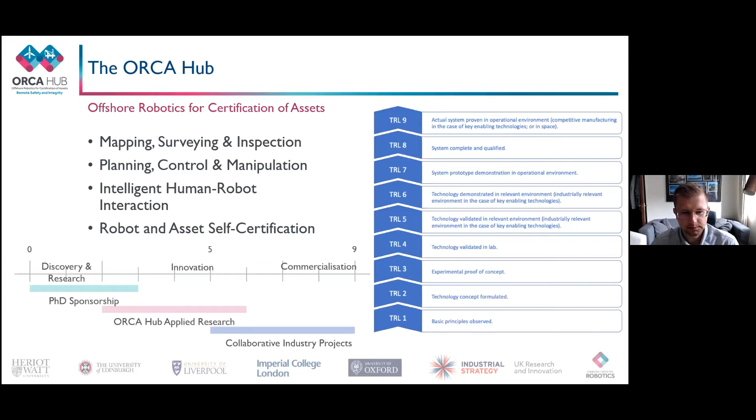ORCA Hub is quite unique in this regard that it tries to bridge the gap between early research and commercialization. On the TRL scale, we try to move between levels 3 and 6. Keeping this in mind, I will discuss solutions that we've developed following these TRL scales, starting from the bottom and ending with solutions which are ready for commercialization.

Again, if we want to have something applied and really used, we have to focus on some key problems. First one being robustness. Demonstrating something that works once is not good enough for us. We want something that works in a wide range of conditions, which is a tool that we can rely on. And we need it to work in real time because underwater vehicles often cannot be connected to the surface with bandwidth required for any kind of computation happening on the surface, or this connection is not reliable enough to run it this way. So preferably everything should run on the vehicle in real time. These two factors, robustness and real-time performance, are key enablers for autonomy, and this is our end goal. We want underwater vehicles to move autonomously, perform the most challenging tasks autonomously, and that's what we're working towards.

Within work package 1, we focus on solutions based on SLAM, simultaneous localization and mapping, based on supported vision. By supported vision, I mean the main source of information are cameras for moving around and localizing ourselves. But we also fuse this visual information with other sensors like IMU and DVL for best possible performance. Finally, we would not only want to have a 3D map at the end of the mission, but also have some understanding of what's in front of us and what it means for the objective of the mission. Hence, we also work on semantic mapping and scene understanding.

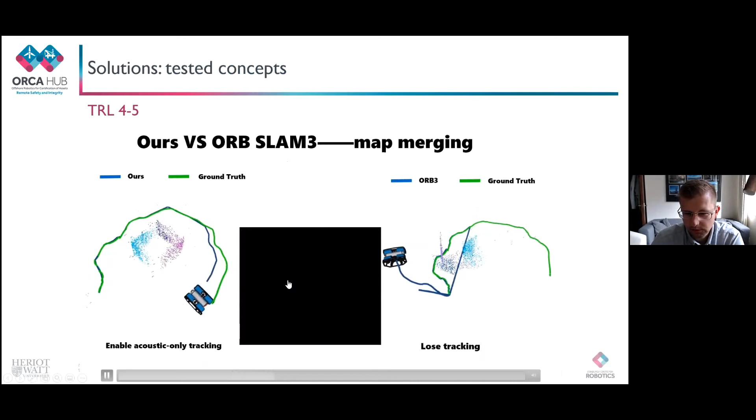That's why let's jump quickly to TRL 4 to 5, and these are very exciting results. This particular work is by one of our PhD students. Here we compare his SLAM approach to ORB SLAM 3, which is state of the art. Every now and then he introduced black frames, which corresponds to loss of visual features, either due to very bad visibility or something occluding the field of view.

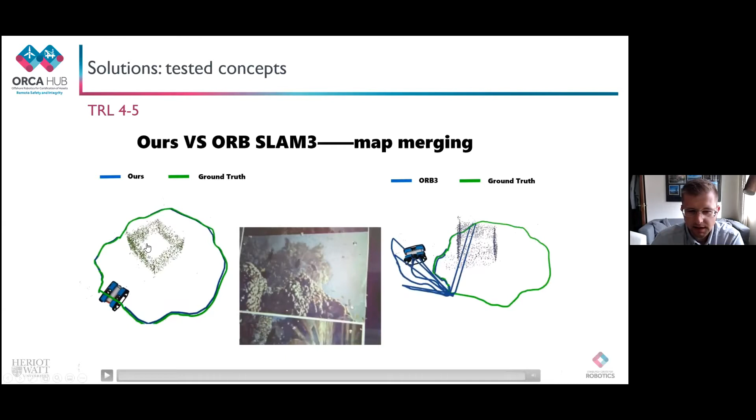You can see that ORB SLAM 3 creates submaps, but in between these maps, it's completely lost. It doesn't know how to join it. In our approach, these submaps are much better aligned to begin with, and after moving a while in the region, you can actually rejoin these maps together and get to a consistent single map.

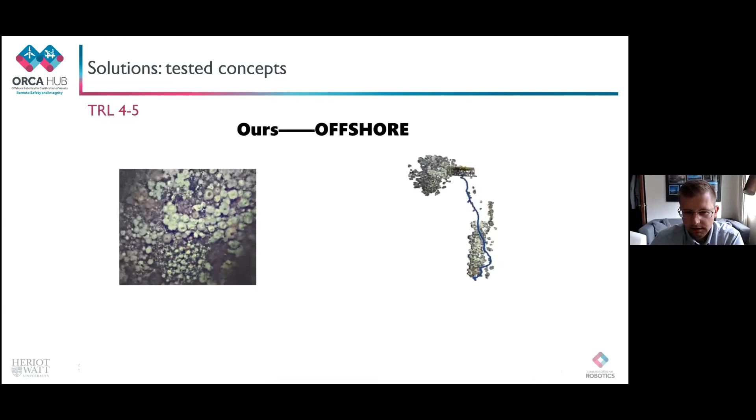And the calculated path taken by the vehicle agrees with the ground truth that we had for this experiment. So that's a great success, and this was also tested offshore. This is data recorded offshore. As you can see in the video, very challenging conditions. And even though we didn't have ground truth for this, just assessing the quality of the result, visually it looks like it's a correct solution.

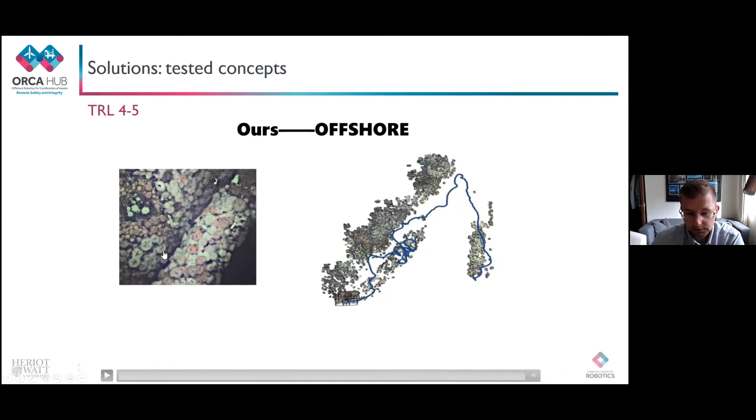So everything that should be straight pipes look like pipes. And again, this data set was very challenging, to the point that we didn't think it would be of any use at all. And yet it managed to, this algorithm manages to work in these conditions.

And thanks to that, we are able to develop a more holistic approach to autonomous inspection. I don't want to go into this bit of work because this will be discussed in detail in the next presentations, so just a hint that that's very much ongoing research. I put it on TRL 4 to 5. It's being developed very quickly, so possibly it's on the verge of 5 to 6 at the moment.

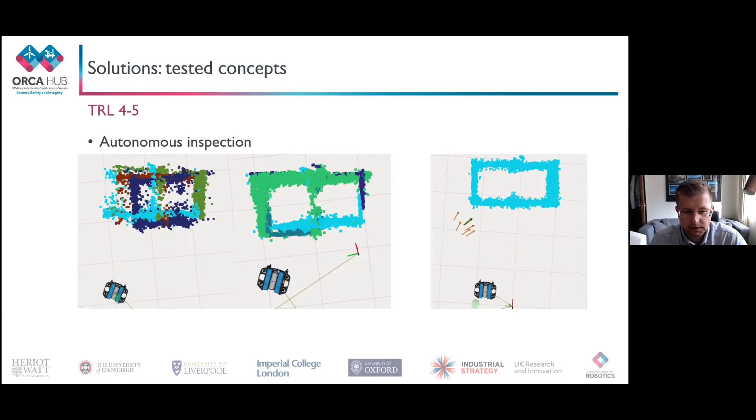Yeah, and this allows inspection to be executed fully autonomously without any intervention from the pilot side.

Okay, and TRL level 6 to 9. From our perspective, this means that these are solutions which are fully developed for our research. This is our toolbox of things that we use and things that we rely on.

So camera calibration and image rectification. The problem is that when you take your cameras underwater and you want to perform 3D reconstruction, all the images are distorted because of the refraction on the water-glass-air interface in the camera housing. And these distortions are very hard to rectify, to correct, because an image doesn't have a single viewpoint anymore. In a way, it's as if every pixel has slightly different focal length.

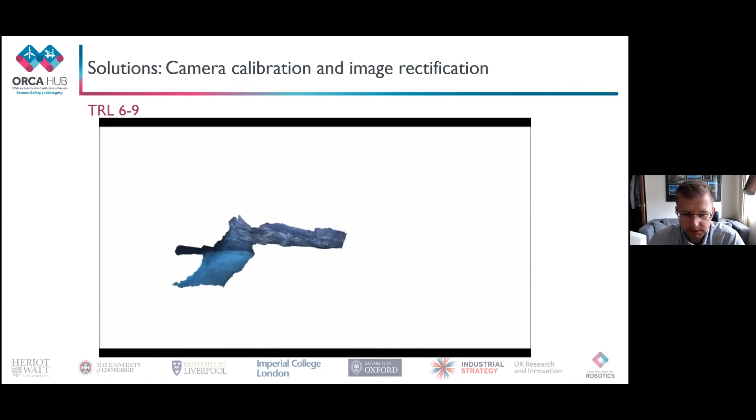And we have a method which allows not only to correct those, but you don't have to do any procedure on site. So you don't have to calibrate the camera in water, even though these distortions depend on water temperature, salinity, and pressure — conditions that can change from site to site. We just have to calibrate the cameras once in air and then know these parameters of water to predict the camera parameters.

In this experiment that you can see on the video, point clouds were just accumulated according to the vehicle odometry. So if there was any error in the image rectification, you would see each point cloud being slightly warped. And once they're overlaid, you will just see a lot of points flying in air.

And as you can see, we have a very smooth surface with no extra points in the wrong locations, which is a good indicator of very precise rectification, which is exactly what we want. So this allows us to get 3D reconstruction on exactly the same level as algorithms working in air, pretty much ignoring the fact that we are underwater.

Yeah, that's just a summary of the map from these experiments. Just a point cloud from that location.

And then second solution, which is also, I estimate, TRL 6 to 9, is image enhancement, where this algorithm merges multiple factors and multiple solutions into one very compact algorithm. So that's why I will show you a few experiments aiming at different things.

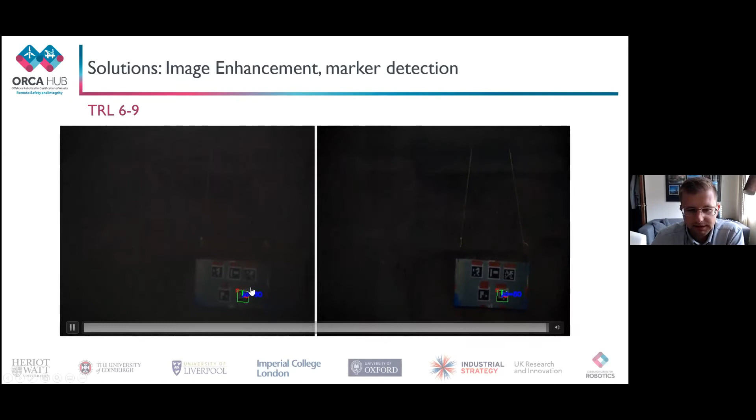This marker is just an easy way of simulating some kind of visual feature we can find in the environment. As you'll see later, this allows any vision-based image recognition, object recognition, and localization method to work more robustly. It extends the range in which we can successfully use whatever approach we decide to go with.

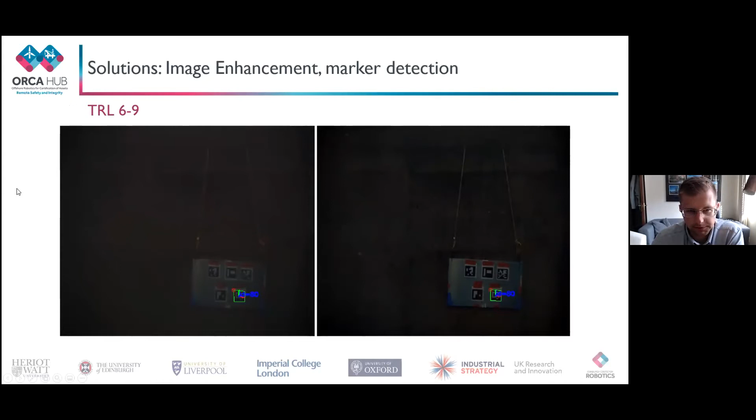Finally, exactly the same algorithm, this time working in open water. On the left is the raw frame recorded from the camera, and on the right it's being enhanced in real time. The slight lag in the video comes from the communication layer, not from the algorithm. The algorithm now works up to 40 Hertz on the stereo setup, so two streams of video.

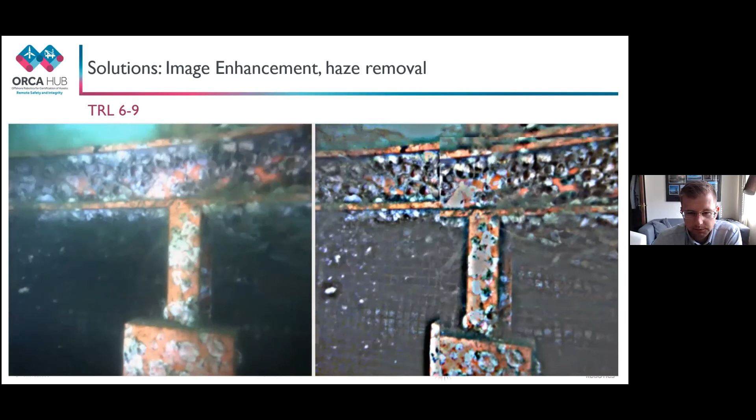And it's just this one image enhancement algorithm, so we could technically also improve colors or saturate it more. I didn't want to do that in this video, just to demonstrate this one algorithm rather than a combined approach.

I'll jump to an early stage here, on the side of the structure. The algorithm is in a way aware of the differences in enhancement it needs to make in different parts of the video. On the left of the image, where there's pretty much nothing there, it still attempts to pull all the information that might be there, which is why you effectively get this sensor noise.

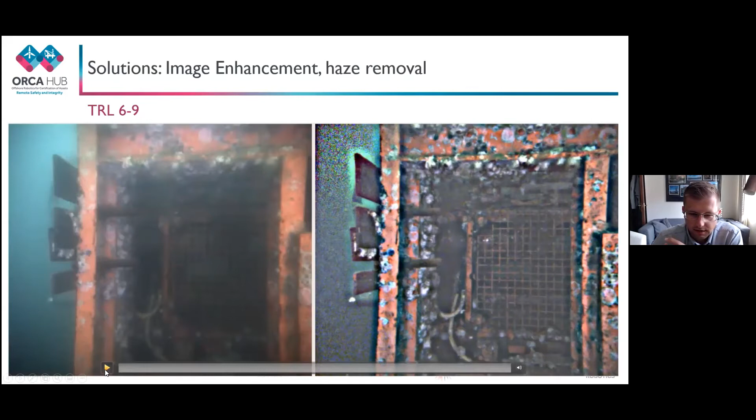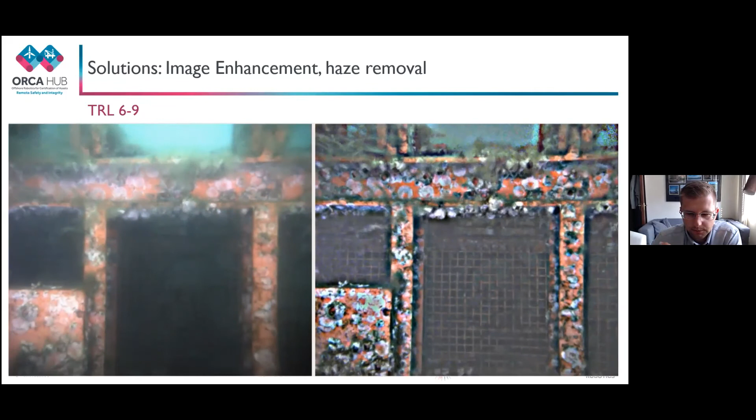In a place where there is structure close by, you don't get that, because if you tried to do the same level of enhancement, everything could be over-enhanced and destroyed. Here you don't have this effect - it's adaptively reacting to what's in the frame. If there's nothing or very little, it tries to be more aggressive; if there's already information in the image, it's a bit more conservative. So you get the most out of the data you recorded.

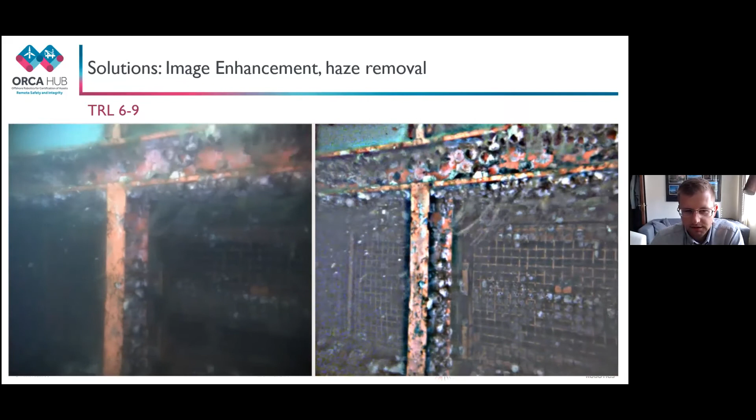That being said, it's a purely passive approach, so it has to have some residual information in the image in the first place. If the image is just broken, with nothing there, unfortunately we can't do anything about it. But that's very much the nature of what we wanted to achieve.

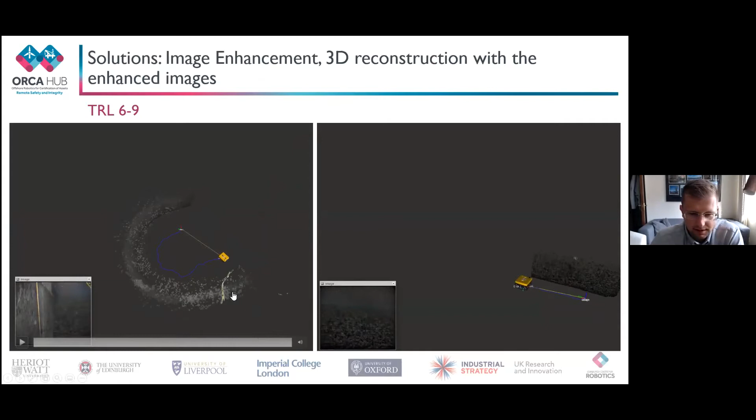That's because all the features it could match were very hazy. After enhancing the image, exactly the same algorithm with exactly the same parameters can reconstruct the structure and navigate on it without any problems, with much higher accuracy and no noise whatsoever - which is exactly what we wanted and what we observed. As long as we have any residual information, we can quite reliably operate around the structure.

That being said, sometimes we come to a location like a harbor after the rain, where visibility is 10 to 15 centimeters, and unfortunately we cannot do anything about it. But that's quite rare, and this was to be expected in the first place.

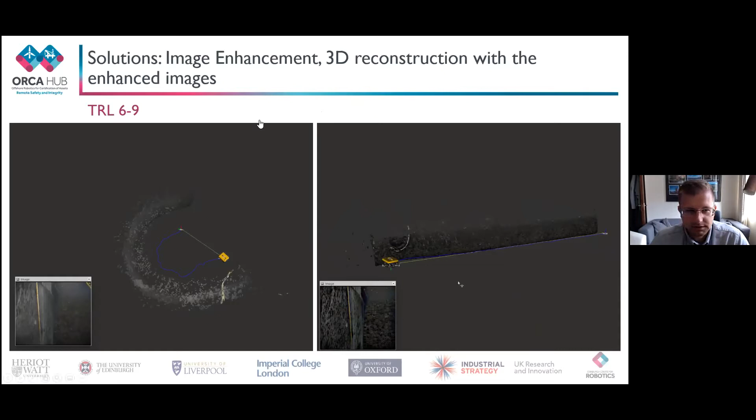Good morning, I'm Jonatan Scharff Willners, and I'm a research associate for ORCA Hub at Heriot-Watt University as well. I will continue this presentation by talking about how we use autonomy for underwater robotics and how we incorporate all the visual aspects that Tomasz has presented.

And to continue on the same motivation, I will instead focus on how we can use autonomy for robust online systems.

The motivation behind the work is that autonomous marine vehicles are seeing increased usage every year. Conventionally, these operations are performed from support ships, which requires a significant amount of humans, both as crew for the ship as well as for operating the ROVs. As the ocean is a harsh and unforgiving place, this is a dangerous task. By using autonomous underwater vehicles, we can remove humans from on-site operations, allowing them to be safe on shore instead. This also reduces the cost of operations as well as environmental impact, as we no longer need large support ships during operations.

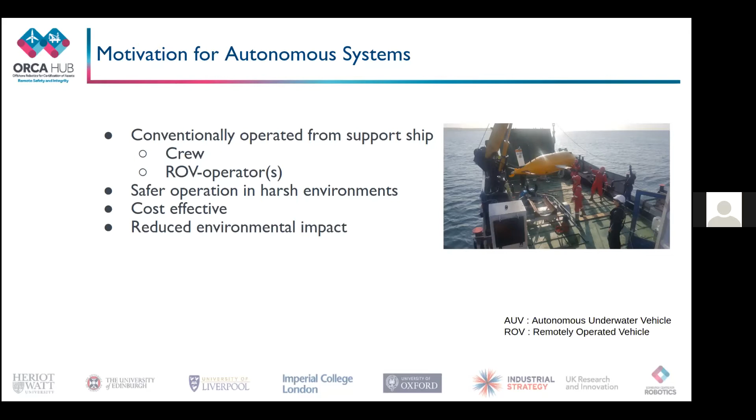AUVs have a wide field of usage. I will focus on two aspects for mapping, namely inspection and exploration, though they are also used for mapping for environmental observations and applications. In our group, we're also working on maintenance such as intervention, which can be seen in the picture where our AUV is equipped with a manipulator. What can be seen in the image is marine growth, which regularly should be cleaned to maintain the structure.

AUVs are also used to cover large areas for search and rescue missions, for example finding people or missing airplanes. They also see quite a lot of usage in deep sea operations, as well as in the defense sector, for example mine countermeasures.

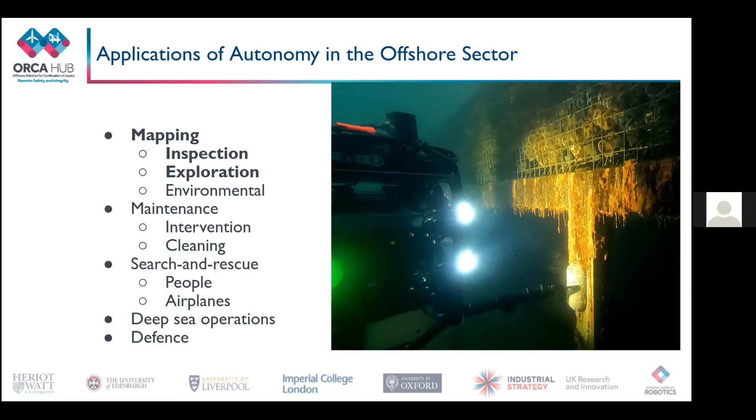During visual inspection of offshore assets, it is easy to lose tracking of the visual features used for simultaneous localization and mapping. There are multiple causes for this. As we've seen previously, it could be environmental, such as turbidity and inadequate water conditions, or internal, such as error and noise related to dead reckoning for pose estimation based on the navigational sensors.

At sea, we also have lots of external forces, such as waves and current, that can push the vehicle out of its desired position. And when visual tracking is lost, our SLAM system relies completely on dead reckoning and has no external features to update its position towards. Therefore, until our visual features are regained, the error and uncertainty can grow without bound.

To counter this, we have developed a framework for robust inspection based on autonomous relocalization. This work improves the success rate as well as the quality and the survivability of the system during its mission.

The framework for this we have called Situational Evaluation and Awareness, which combines knowledge of mission failure characteristics with planning for current states to provide system robustness over long time periods, while maintaining the quality of information gathering and goal execution. I will not go into much more detail on this, because Yaniel will discuss it further in his presentation after mine. The framework adapts to new information when a new error occurs during the mission.

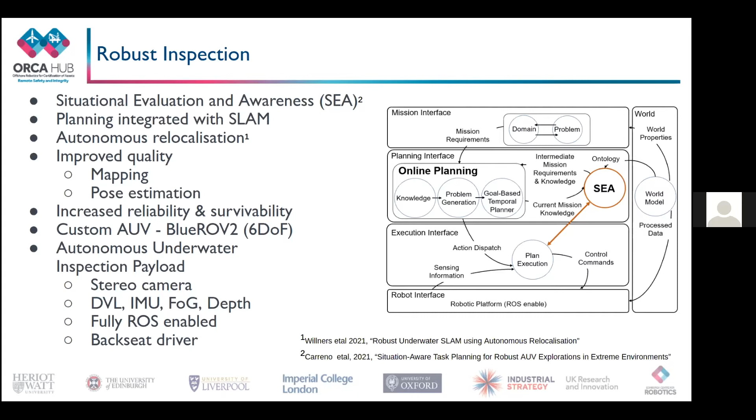We have integrated this with an ROV, which has been customized to be autonomous by adding what we call an autonomous underwater inspection payload. This acts as a backseat driver, and includes the stereo camera system seen in the previous presentation, as well as additional sensors such as DVL, IMU, fiber optic gyro, and depth sensor, so that we can have pose estimation at all times, even when we lose visual feature tracking.

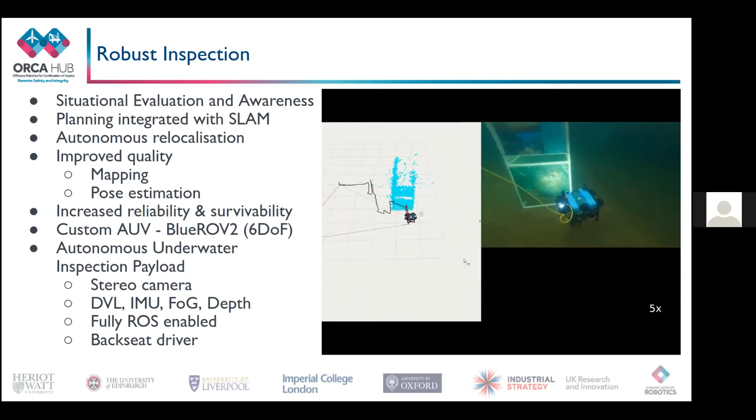In the video, you can see how an autonomous inspection of an artificial structure is performed while using the framework for autonomous relocalization. To show the efficiency of the approach, we force the vehicle to lose tracking by blacking out the cameras at set stages of the mission. By doing this in repeated inspections, we can compare how our approach has performed compared to not using active relocalization and just using a traditional waypoint following algorithm.

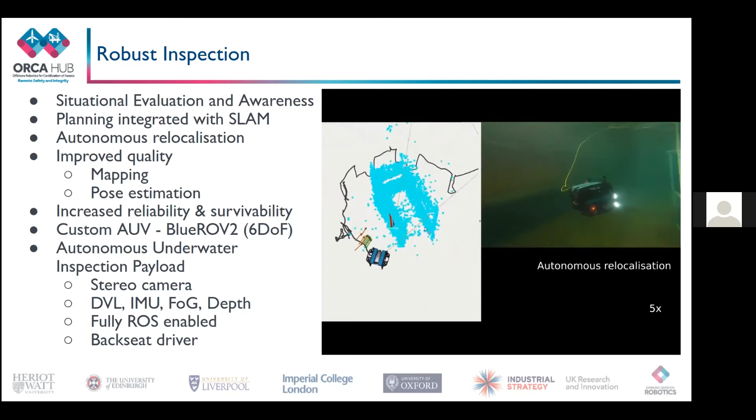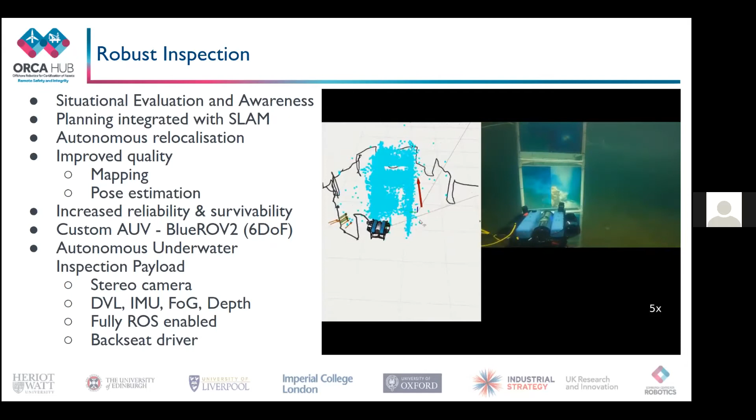As seen, the robot manages to relocalize when it's lost and is able to keep a single consistent map throughout the mission. In the video, when a map of a new color is presented, it has lost track and will try to find a temporal plan that merges the new map to the old map. The keyframes it's basing its new temporal plan on can be seen as the green arrows, and the orange ones are the ones it has found that it should visit to increase the probability of performing this map merge. It has now almost finished a complete lap around the structure, and after that it will return to a safe recovered position.

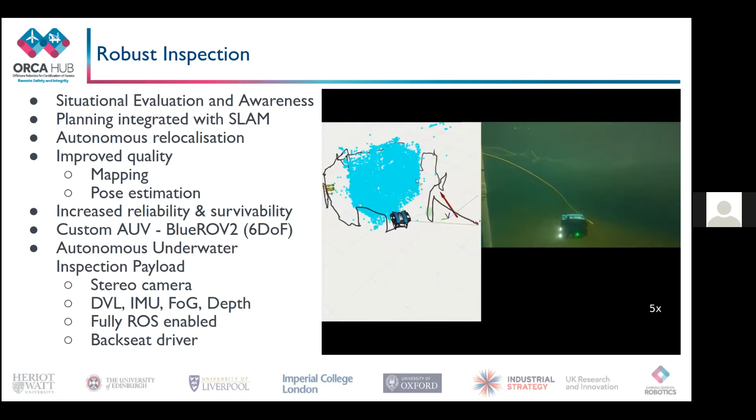Here it can be seen that using the presented framework, the robot managed to keep a single map at the end of a mission, while the compared approaches result in multiple submaps. The submaps are not properly aligned, which can cause error and lower quality reconstructions. Likewise, if it has multiple maps, it can result in a worse pose estimation, which can potentially grow with each submap until the robot cannot properly navigate in a global map anymore.

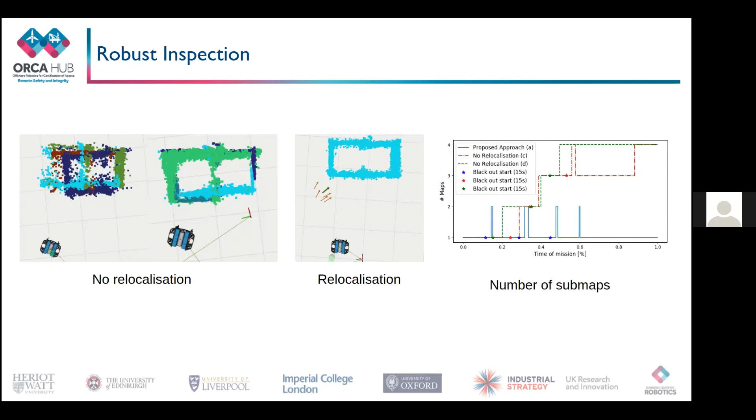In the graph, you can see how when our approach creates a new map, it can quickly manage to relocalize with the initial map to keep a single map, while the other approaches have a continuously increasing number of maps.

The autonomous relocalization framework can be applied to many scenarios. We have seen it used for inspection in the previous video, when the structure is known and a mission can be planned in advance. If the structure is known, we can find a set of viewpoints that can efficiently provide full sensor coverage of the environment. This can either be generated based on the geometry of the structure or a CAD model.

However, much of the ocean is unexplored, and we don't always have access to data about the target or structure of interest. In such cases, the optimization approaches to find an optimal path for complete sensor coverage cannot be used. Instead, the robot will need to explore the structure and continuously update its path based on current knowledge about the environment.

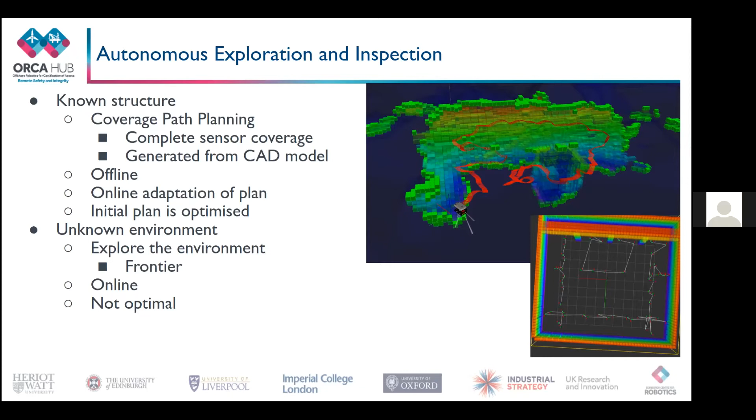In this video, it can be seen how an AUV is exploring the same structure as in the autonomous inspection video earlier, but doing so without any prior knowledge about the environment. It uses the boundary, or frontier, between what has been explored so far and what is still unknown to find new viewpoints and generate new information about the environment. And while doing this, it's also performing

the autonomous relocalization whenever it's needed. In the video, you can see we use an Octomap, as we don't need too much detail about the environment - this is also plenty enough information to use for planning.

The green boxes in this map represent the current frontier, where potential new information exists. The robot will try to find new viewpoints that provide good information both about the potential new environment, as well as keeping old points it had already seen within its frame of view, so that it can also keep a quite high confidence in its localization.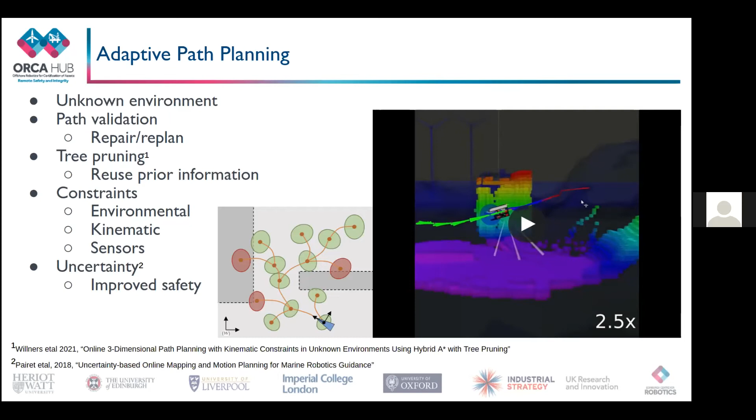By including the kinematic constraints as well as information about the sensors, we can also include uncertainty during planning. As seen in the left image, you can see ellipses representing the uncertainty of the robot.

Which can be propagated along the path to reduce the chances of collision due to error in pose estimation over time. So a last thing I want to share before finishing is an interesting thing we saw happen on multiple occasions when using autonomous relocalization. In the images to the left, you can see the AUV moving around the corner, and while doing so, it lost track of the prior side.

When it came to the other side, it started a new map there, and the autonomous relocalization procedure was started. It would then keep the new map in memory while autonomously moving back to the prior side. We were able to perform a map merge, and at this point it now has two connected maps on both sides of the structure and can again safely move around the corner without losing track.

This was a very interesting behavior of the autonomy framework that we did not necessarily predict, but it shows a great advantage of the autonomy as well. And with that, I'm finished for my part. If you have any questions, please feel free to ask them.

Thank you. Where do you see the applications for this going forward?

Yes, so our next step is to test this in more real scenarios. Right now we have mainly tested it in our tank with artificial structures, but we're soon going out to test this at wind farms. In the video playing now, you can see how it is autonomously exploring a wind farm, which we have no information about at all.

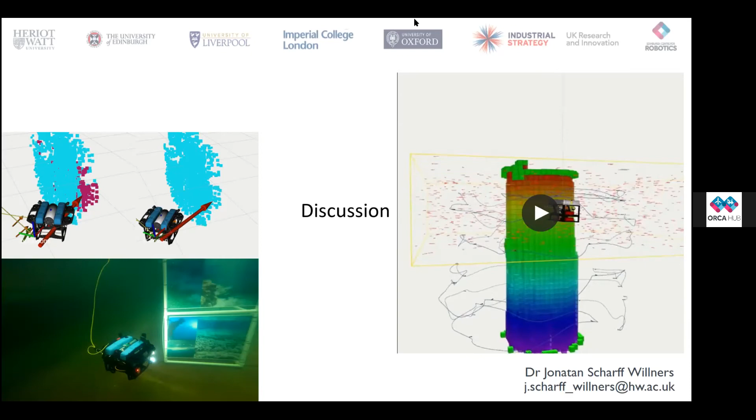Good morning everybody, thank you very much for being here. So I'm Yaniel Carreno, I'm a PhD student in the final year of my PhD at the Edinburgh Centre of Robotics, and I'm also a research assistant in the ORCA Hub project.

So today I'm going to talk about our work in AI planning for long-term autonomy. Basically it's another level up, considering what Tomasz and Jonatan were discussing before, and how we can integrate in some way all their wonderful work in an autonomous framework that is able to deal with a set of conditions of the environment, the uncertainty, and make the system robust enough to deal with all kinds of unexpected behaviors and missions that we can have on the water.

So long-term autonomy for the underwater domain is one of the most important issues we need to consider when implementing a mission in this kind of environment. Real-world applications for these autonomous systems require the implementation of goals, tasks, and missions in dynamic environments. And because of the characteristics of the mission, many times it's required to implement coordination and collaboration between multiple robots that present different capabilities.

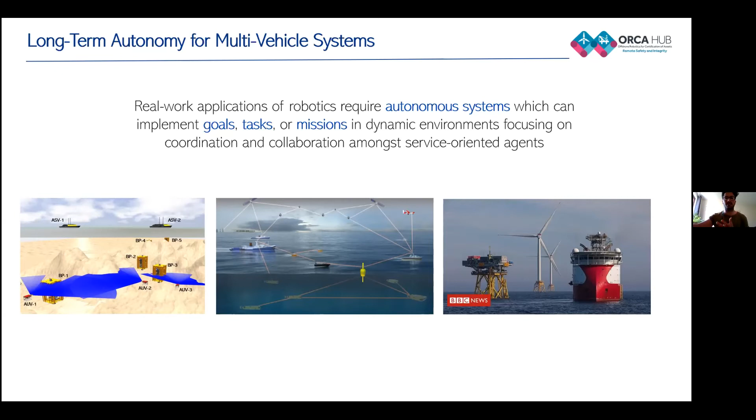So the solution for these problems obviously considers the search for and execution of a sequence of actions that leads the robot from the initial state where they are to a final state where we achieve all the goals in the mission, considering mission constraints and the requirements for the implementation.

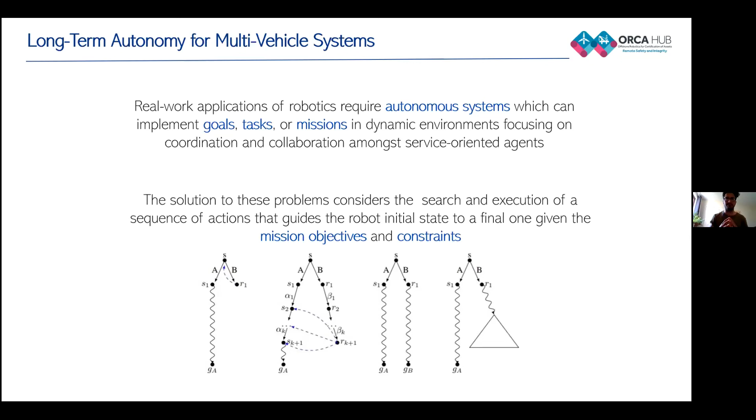So basically, task planning is trying to develop a solution for multiple robots, or for a single robot, to achieve persistence and robustness to individual platform failures, and improve mission execution in terms of the timelines and the quality of the intelligence gathered.

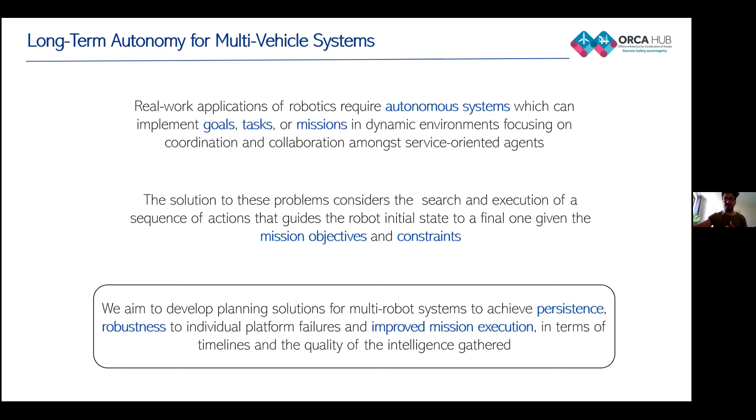Obviously, in the context of this project, we have been working with multiple robots with different capabilities, and the connection is basically task planning for the work we're doing. We aim to allow the system to be embedded in different robots independently of their characteristics, obviously considering the sensory system and actuators they have.

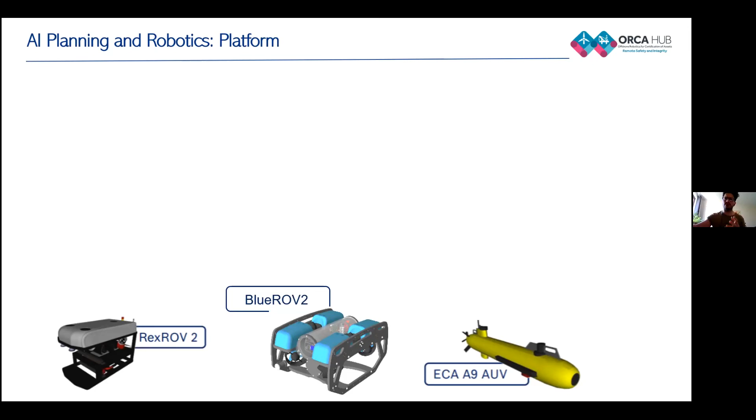So today I'm going to just focus on a single robot, the BlueROV2, which we call Dora. I'm going to describe the different parts in the framework that we need to consider when implementing task planning.

The first is how we achieve the initial model that describes the characteristics of the environment. There we consider the different features we can have in the water, but also all the elements associated with the robot's characteristics.

The second important element to consider is the specifications of the mission. There we need to think about the goals, but also the constraints. For example, when talking about constraints and metrics, we consider the time required to implement the mission, and all these elements that allow the system to reason about the optimal solution to the problem.

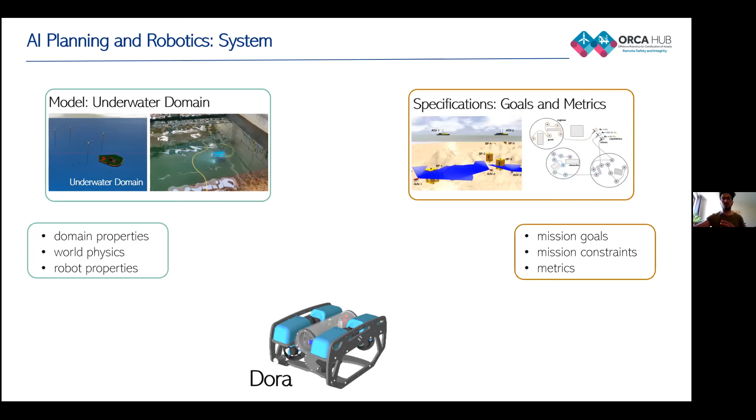These two elements are part of the automated planning system, which deals with temporal requirements, concurrent action execution, incomplete knowledge in the system, and the coordination and collaboration between robots, if that is the case for the mission.

There are three main elements defined in the automated planning system. The first is how we can allocate tasks optimally in cases where a single robot is not able to implement the mission. Then, how we generate a solution to that mission, and how the initial knowledge we have from the environment and the robot can be increased to obtain a final, better solution.

Finally, one of the most important parts in my mind is how we close the loop in some way, related to execution. There we consider how the system deals with replanning during the mission. Replanning happens when the initial plan, that sequence of actions to implement the goals, is not able to be executed completely with good quality, making it necessary to replan this initial mission.

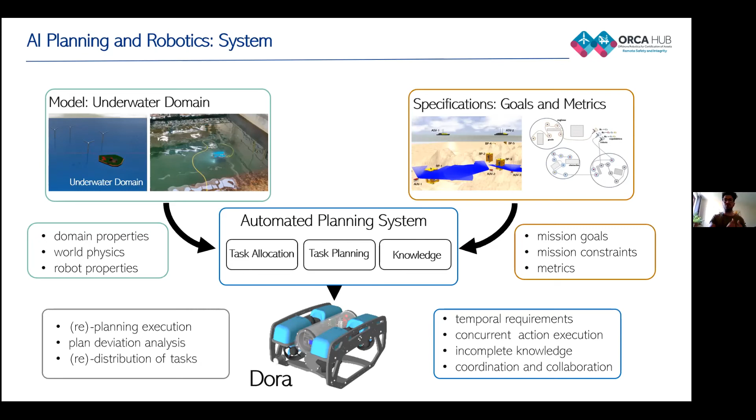So focusing first on task allocation, we have been doing some work in this area in order to develop an approach that allocates mission goals based on the characteristics of the environment and the characteristics of the robot.

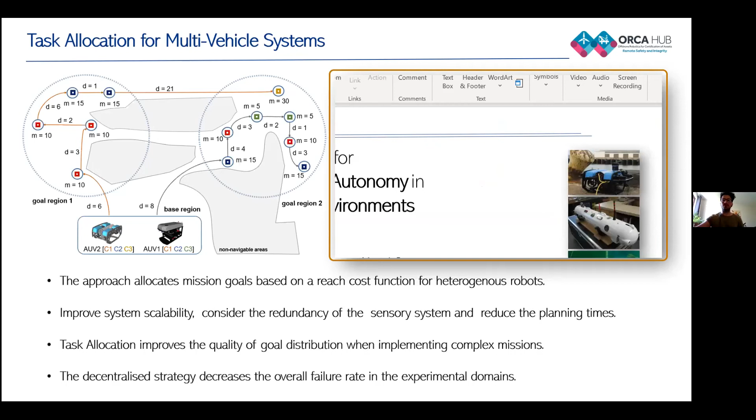We managed to have a solution that deals with scalability issues, one of the main elements to consider, but also with redundancy in the sensory system. By redundancy, I mean that some sensors may fail during the mission. Is it still possible to continue with this action, or is it necessary to replan, or ask for help from other robots in the environment? And finally, how we can reduce the planning times in our implementation.

In this case, I would like to show you one of the applications that we have.

For example, we have multiple robots in the environment that need to implement different tasks associated to turning valves in the structures, but also they need to sample the terrain. Here you can see the low-level algorithm doing the mapping. And this kind of distribution of goals is something we managed to optimize considering the capabilities of the system.

And finally, we have a decentralized strategy. Obviously that is one of the main elements because we are working in the underwater domain where we have different constraints associated with communication. And we want, from the beginning of the mission, to obtain a solution that deals in a better way with the distribution of goals.

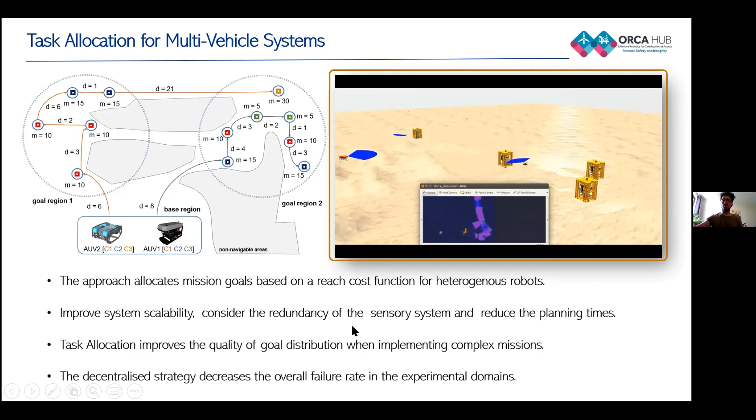So now, focusing on what happens when we already have an optimal distribution of goals, each robot knows what it needs to do. What happens during the execution? Well, first, I would like to talk about how we can achieve robustness and adaptability in our system.

One of the first elements is that we focus on having a planner that deals with the information from the environment, the uncertainty from the environment, in order to provide a solution that considers temporal constraints associated with the time to implement the mission. In this case, we have surface robots and underwater robots.

During the implementation of the mission, the robot needs to recharge, needs to go to the surface and recharge with this autonomous surface vehicle. In that case, there are particular constraints because the surface vehicle can be in that position just for a single time or particular time slots. So we need to have a plan that considers these temporal constraints in order to solve the solution.

But at the same time, our framework considers the uncertainty in the environment, and this is the second strong element we deal with in our solutions. For example, imagine we need to go to a particular structure and close a valve, but we don't know the state of that valve - it can be open or closed, but we need to close it. So when the robot goes there, it needs to sense and get real information at execution time in order to deal with that situation.

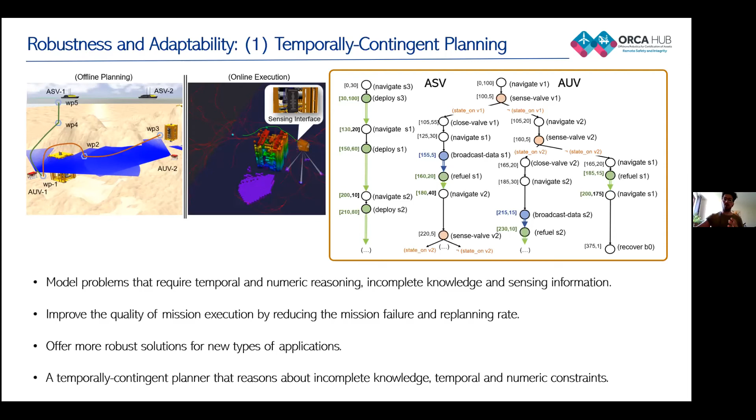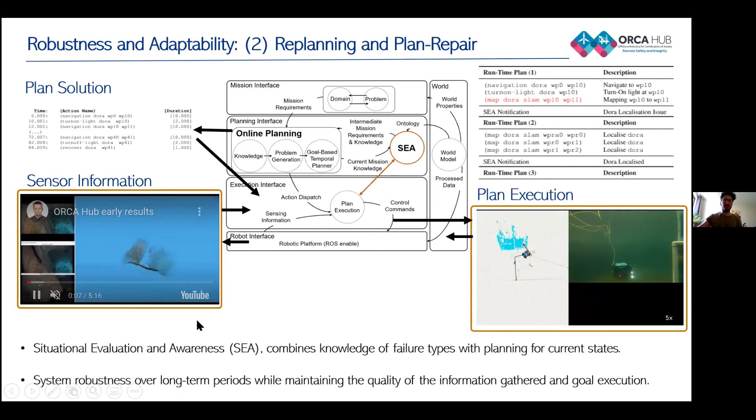There are particular types of uncertainty that we can deal with using a temporal contingent planner. But obviously, during the implementation of the mission, there are other sets of problems we can face that can affect the solution of the plan implementation. And then is when situation evaluation and awareness came in, which Jonatan was mentioning initially.

And this is basically our framework, dealing with another set of unexpected situations not considered in the initial plan. So we have an initial plan, which is a sequence of actions. What our system does is take all the information from the plan execution and the sensing information - processed by the work Tomasz was describing - in order to provide replanning, provide optimal plans that deal with these particular failures. At the same time, we keep implementing the set of goals that were initially defined, which are basically the mission requirements.

So in this case, just to put it in context, I think Jonatan explained very well the characteristics of this mission we're trying to accomplish. Imagine that this is the original plan we're implementing, and when we were doing this mapping, we realized we lose track of the features, and a new plan, a new map is being built. So this is not optimal.

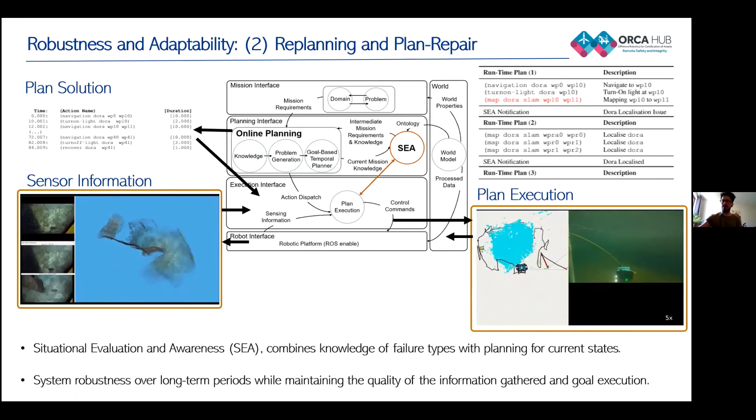In those cases, we receive this information from the sensing system, which connects with the SEA, and SEA provides intermediate mission requirements and knowledge to the online planner in order to replan for these particular failures, allowing the system to move on from these not optimal, failure states. After that, the system reasons about the sequence of actions that will move it from this situation, and then continues implementing the mission.

Our system is able to maintain the quality of the information we have gathered, and obviously the mission operation over a long-term period, because we deal with multiple failures that are considered by SEA, and we have solutions that deal with that particular characteristic of the implementation for that failure.

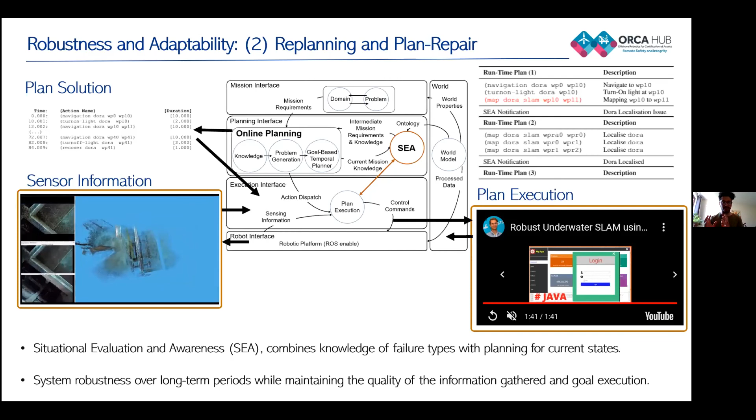So if we put this in terms of the context of what we have in the execution system, basically we start ORCA in some way with this framework. It's a framework where we have four main elements connected with the world: first, the mission interface, the planning interface, execution interface, and the robot.

But then we have been working to build during these years, and I think it's wonderful, a system that deals with this kind of optimization of the allocation of missions. At the same time, it takes into account the information known at the initial state, a set of information.

We also have SEA that is connected to the execution in order to deal with the adaptability of that initial plan, which may require moving on from failure situations associated, for example, with the battery level or not optimal mapping of one structure.

And finally, we have the system connected with the runtime plan verbalizer. So basically, we can have information on how this plan is being implemented, but more importantly, the system is able to take information from SEA to describe why my initial plan can be deviated.

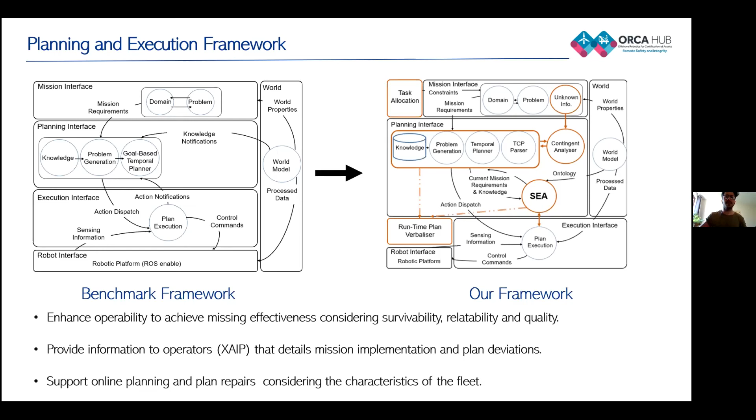I would like to finish talking about this particular kind of solution, because I think in terms of adaptability, we would like to focus on the actions we can have between multiple robots, robots working in different domains, surface and underwater.

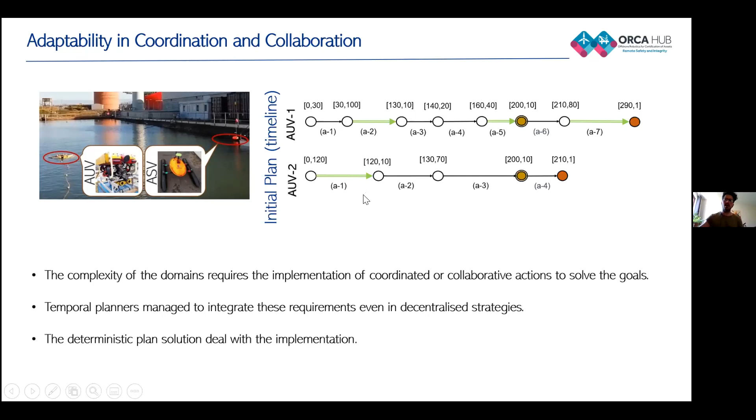But what happens if, during the execution, and I want you to think about what we were discussing before, we have a failure in that initial plan? Our system was able to provide a recovery plan that perhaps will have different types of actions to deal with this failure, in order to maintain the robot working, but at the same time bearing in mind that it needs to finish the other task.

In this kind of situations, what can happen if we don't is we can end up in situations where perhaps this action is not happening anymore at this particular time, because all these new actions need to be replanned since there is a failure at this particular time slot.

But what our system, and what we are working on right now, is thinking about how we can keep adapting this plan at this position, keeping in mind that we need to keep implementing this particular goal at this particular time, because there are other robots that need to go there to execute a coordinated action. And then we are increasing the robustness of the system.

We know that we have some failures associated with this implementation, obviously, and perhaps what is happening with our system is that some actions that were previously implemented before this one need to be moved later. This is an example for A4 and A3.

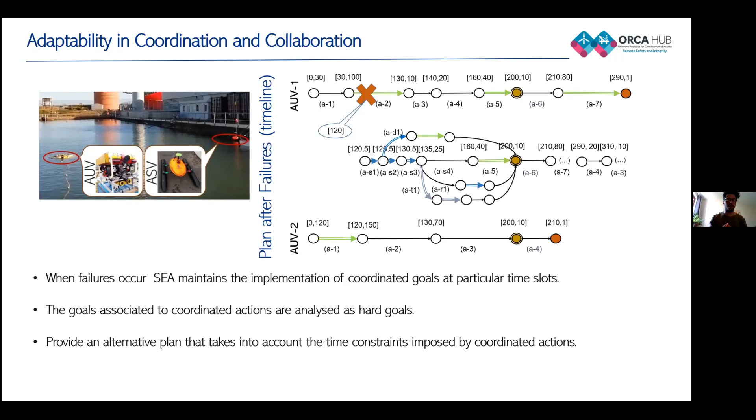But at the same time, we allow the system not to replan for the second robot, because it goes there and realizes that the other robot required to implement the mission is not there anymore. So we are really thinking about going beyond the adaptability of a single robot plan, to think about adaptability of the whole system. I consider that quite interesting and quite challenging from our side, but it will provide very good results in the implementation of the final solution.

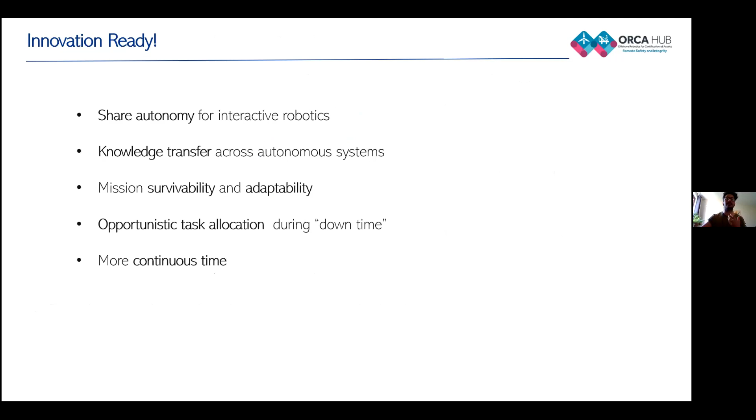Final takeaways: basically we are working on shared autonomy for interactive robots, knowledge transfer across autonomous systems, mission survivability and adaptability, opportunistic task allocation in these cases, and more continuous time, because we are actually interested in maintaining the operation as realistic as possible and maintaining long-term autonomy, definitely.